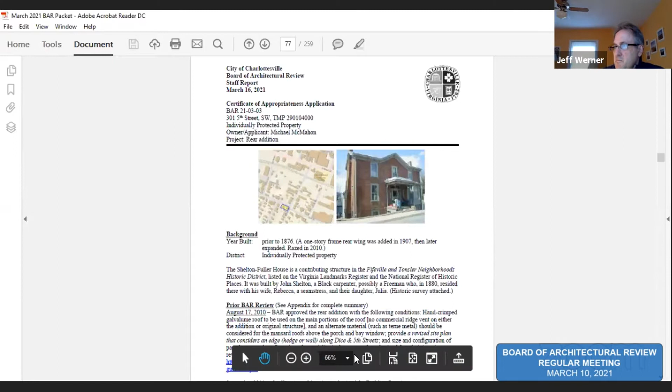Excellent, we probably need to stick to some sort of protocol. So Jeff, you want to introduce this briefly? All right, sorry. No, that's okay. I was trying to tell Michael there's gonna be limited pain tonight. So I've already been through this process, so it's okay. I know, I'm ready for it.

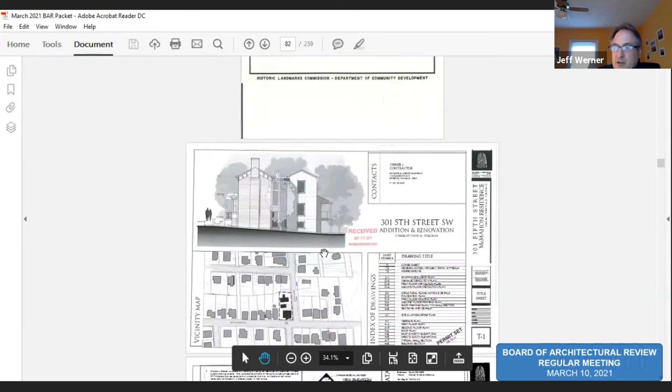All right, so quickly, this is a COA request for 301 Fifth Street Southwest. It's an individually protected property, the Shelton Fuller House. It is a contributing structure in the Fifeville and Tonsler Neighborhoods Historic District, which is listed on the National Register. It was built by John Shelton, a black carpenter, possibly a free man, who in 1880 resided there with his wife, Rebecca, a seamstress, and their daughter, Julia. So it's interesting—this is one of the older homes in the city.

The request is for a COA to construct a rear addition and related site work. This project had been reviewed by the BAR back in 2010, and the project was delayed and the COA expired. So that's why it's been brought back.

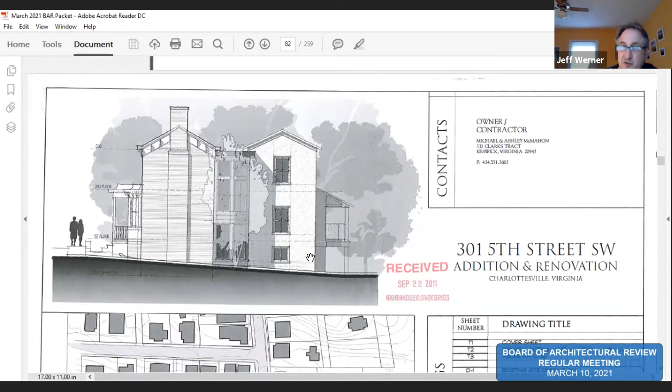The questions that were before the board were addressing the trees on the Dice Street side, so there was a recommendation from one of the BAR members to revisit those. So that's keeping it short and sweet. But staff recommended the approval with the conditions that were referenced by Mr. Schwartz, and whatever changes you all have.

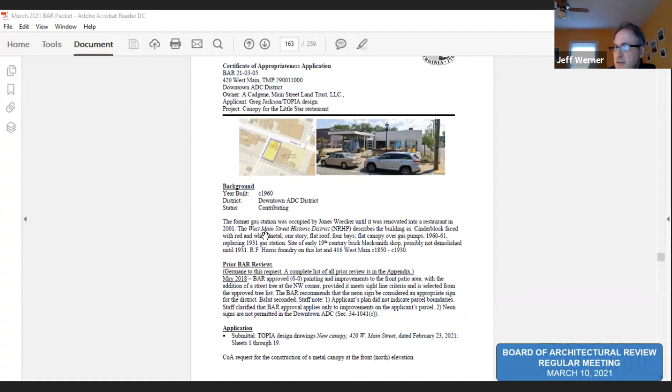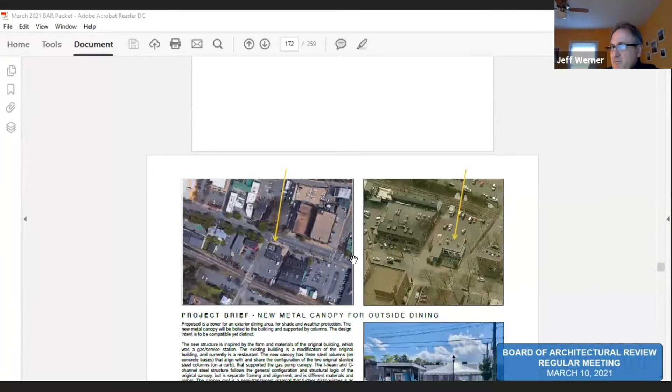I think the most recent time we saw it was in May of 2018. There were some improvements done in that patio area that you see on the front. Again, this is a CoA request for construction of a metal canopy at the front north elevation. Robert, I also have an interesting historic photo—well, not historic, but an old photo of it that's interesting.

As far as staff's recommendations, the building currently contributes, as said, to the West Main Street District, which has a history of automobile-related businesses. The BAR should discuss how the facade changes relate to the original historic building. The building has been modified over the years in adapting it from a service station to a restaurant. While the proposed canopy is aesthetically consistent with the current expression of the building's architecture, it is still an addition to the historic facade.

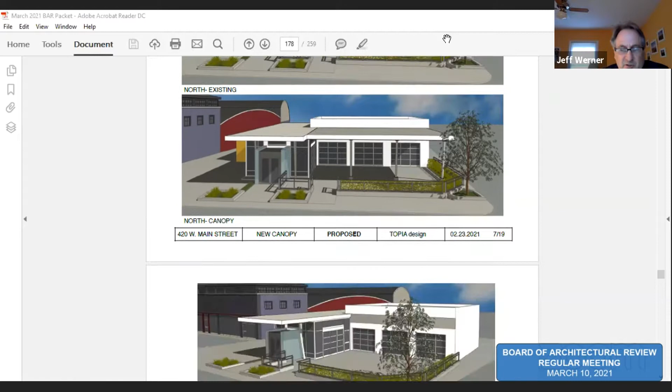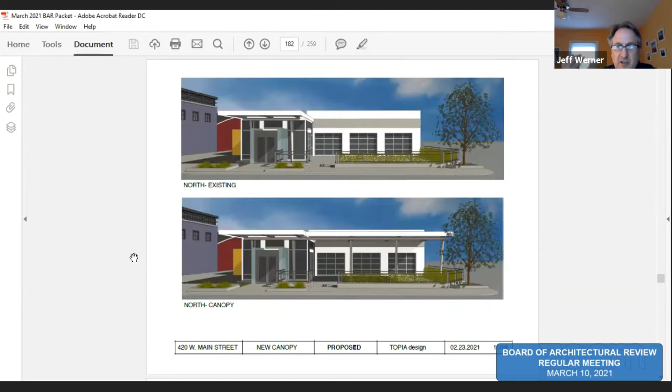Staff does support the design. In fact, we support this proposal and the intent of the design. Our recommendation to the applicant and to you all was that some way this could still remain physically separate, at least have a physical separation from the existing building—not to say that it's not anchored into it, but that it have possibly some connection points, while the surface does not appear to be a continuous part of the historic building.

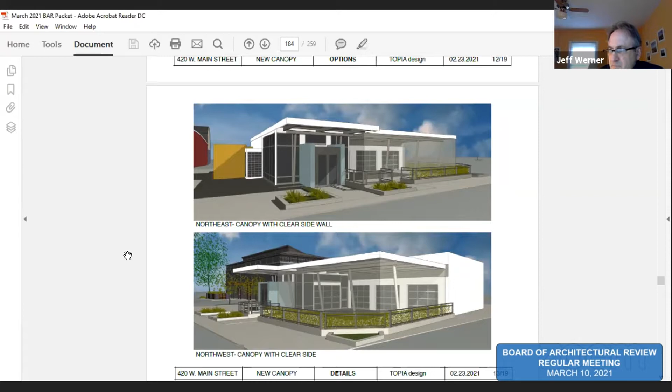There was a comment from the BAR about how the seasonal plastic walls will be anchored, and additionally the recommendation that the polycarbonate roof should have specification that there's a UV protective coating, due to yellowing that can occur on that type of material.

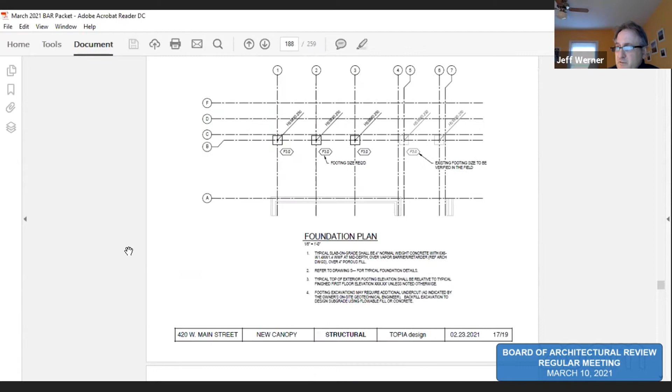There is no exterior lighting indicated. However, the BAR can also apply conditions we've used for lighting if it chooses. I'm sorry, it is the catenary lights, but not in terms of bright exterior lights. So again, our recommendation is approval, along with our comments about the design.

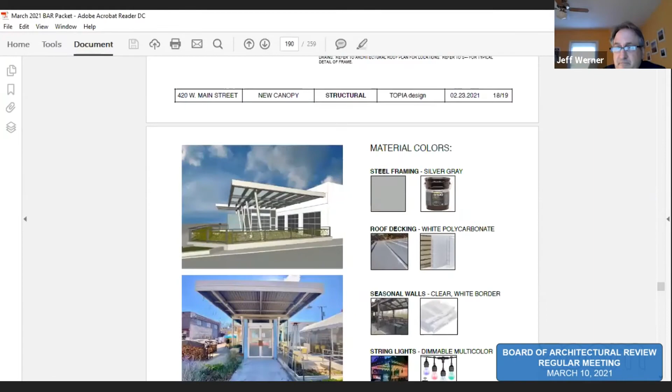Any questions for us? All right, Mr. Jackson, it's yours. Greg, I'm happy to go back into the application and share any page that you'd like.

Okay, hi everybody. I guess one thing I'll comment, there is a noting of lighting, although I know it's not attached in a permanent manner, but there is consideration for it — the owner wanted string lights that are dimmable, and will certainly adhere to the criteria suggested in 414.

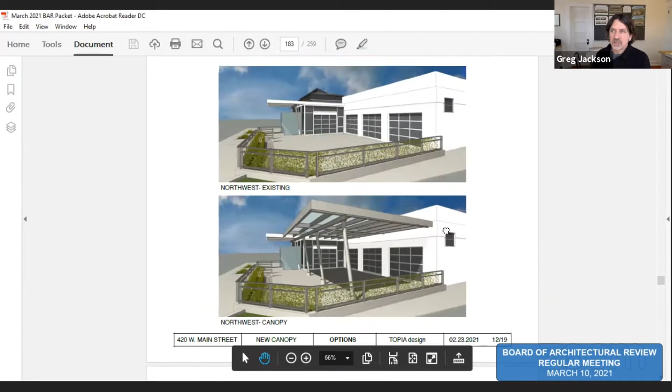And then I'm ready for any questions. One thing I am noting is that unfortunately my rendering is not perhaps as accurate as my color description. Probably page 12 gives a better indication of the difference in colors — painted silver gray against the white building, which was the change made since the last BAR meeting.

All right, well, thank you, Greg. Are there any questions from the public? Please use the raise your hand feature or press star 9. I'm looking at the attendee list, Carl, and I don't see any raised hands.

Okay, questions? I also have a sample of the poly roof if anybody's interested. So I like that. And I've held it up to the sun, and it does not allow the sun to come through as glare, which was one of my big concerns. Yet it does let light through.

The bronze and clear versions are different in their characteristics and what they do, because I was somewhat fighting the owner a little bit on this, but when I got the sample and was able to test it myself, I was turned around a little bit about it. And I did email the rep today to triple check that it is a UV coating on it to protect it from the elements. Thank you.

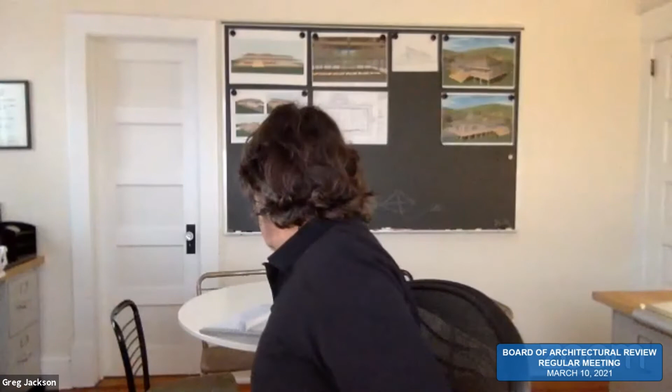Any questions from the board? I'm curious — so you're intending on supporting this off of the structure that's in the existing canopy, correct? So you would be kind of puncturing the metal skin on the side of that canopy? That's correct. Have you thought at all how that detail is going to work? Are you just going to cut a hole and sleeve it in cleanly, or are you taking off that metal?

No, I haven't considered that fully. I'm looking at the structural engineer's diagram, and that's basically what it is. So it doesn't address that completely. I think the intent is to go through and connect to that W10 that's in there, so we have to penetrate it.

So I can certainly get back to you, but I assume the look would be that we keep the flat appearance of the C channel, and the W8 just penetrates it. Now, how that's done, you're right, it could be tricky in being able to make that look clean. But the desire is that it'll just look like the beams are penetrating through the existing canopy, versus taking it off and putting something else in its place.

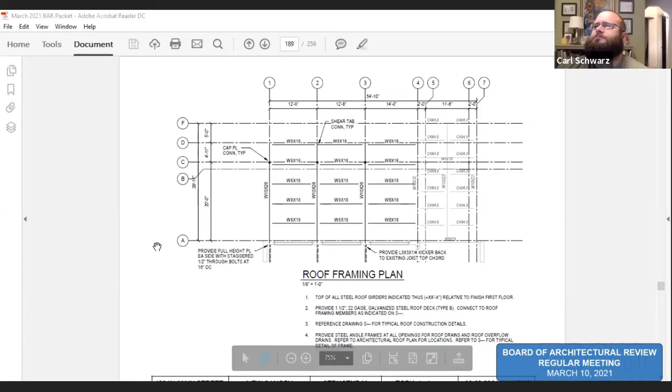And in fact, if you go to the architectural plan, page 15, that's more of the current alignment, we're spacing the W8s closer than they need to be so that they can be the structure for the roof without added purlins or anything like that. So it becomes a cleaner system, although there are more of the W8s in there. So it wouldn't necessarily align with it.

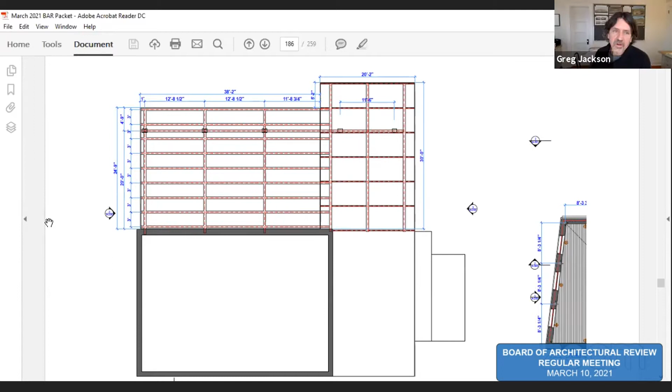In theory, with Carl's question, you would not see from outside to inside, but from inside you would see those members come into that space. Right, so there is definitely some detail work to be figured out about how those two overlap, as Carl pointed out. Okay, yeah, and one to make sure they don't conflict, but the other to make sure it's visually clean.

Yeah, working. Okay, and similarly, you'd need to develop a detail of how it intersects the main portion of the building, because there's a lot of metal panels that, excuse me, probably aren't super easy to just cut a hole in. I don't think - I mean, maybe it is, but you'd also have to flash into there, so I think we get the design intent, but I'm curious how that would end up being detailed.

As well as, where does the water drain off of this? Because it looks like - is it flat or is it sloping to one side? So it's a 1% slope, from the building out to the front. Let me see, I think there's an image somewhere that shows that a little bit better.

Is it page 16? I couldn't tell if that was sloped or not. Yeah, 16, you can kind of make it out.

So you're going to take the water off the front, is the idea? Yeah, so the slope off the front, and the intent is for it to also be sloped out to the west, to the street corner so to speak. At that point we would probably have to have some type of notch or tube to allow it to discharge up near the front corner at the top, or a hole.

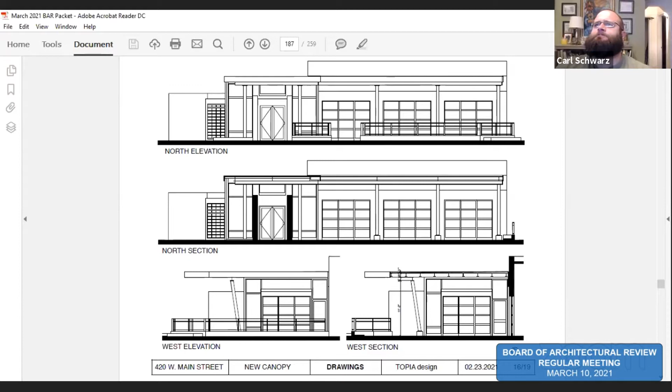Okay. I had one more question. Sorry. Sorry, Carl. No, go ahead. I have to find my question. It's just funny, the

The perspectival warp, or whatever you want to call it, implies that it's actually pitching back toward the building, opposite what Greg just talked about. The one advantage I see to that is you can bring your leaders down against the building and not float out at the outer corner, if your pitch was actually running the other way. Just curious. Yeah, that's a possibility, and that's basically a downspout.

I think at this point we're trying to not have anything else attached to the building and just have it shoot out in a sense. It's raining and it's just coming out from that point, further away from the building. But I see what you're saying.

I don't think - that's what it just sort of implies, the opposite direction, that's all. Yeah, I think it's maybe kind of an illusion in the way the perspective angle of view is when it's a snapshot. That combined with the raked back columns makes it appear like it's doing that. I mean, I see the elevations are flat, so I get it, but it was kind of interesting.

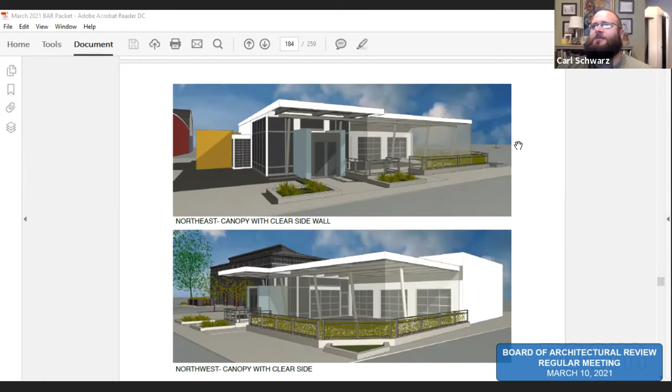I guess I just can't imagine they've got a lot of storage space, because I don't think you can fold this up pretty tightly. Yeah, so I can't see them taking it back inside. Maybe they would, but I guess that's a big question mark for me, is how these panels are going to work.

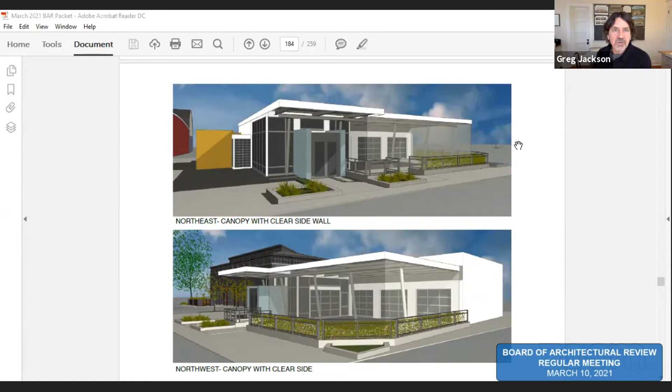Is the intention that they're seasonal, or more like shades? No, seasonal, just for that cold period. I'm hoping that these were put in place - actually, when I sent it as a review to some of you guys a while back, that was a question, and then we looked at it and I talked to the owner, and that's what we proposed. So it wasn't necessarily a part of the original intention to have those.

Had it been, I might have tried to look at some kind of sliding panel type of system or something, but even something like that begins to give it more of a presence that starts to take away from the building rather than just an open air canopy. With the clear plastic, it seems to allow it to still be an open air canopy, so you know it's just a temporary type of cover.

But it hasn't come from the client actually, so frankly I can follow up on that. I assume that they would want to use such, since I see them all over, but maybe by next winter it's not such a concern anymore - they have full indoor dining and it's not necessary. It's kind of a thing now. When we first started talking about this, it was to have it for all the outdoor dining, but I'm not sure if it will be that important, or even if they'll follow through with it.

It looks like you have space along the street elevation, inside the structure, to have a pretty significant roll. Judging by this, you've got about 9 or 10 inches clear under the roof there, behind the C channel, behind the outside channel. But we can adjust and make sure there is space there.

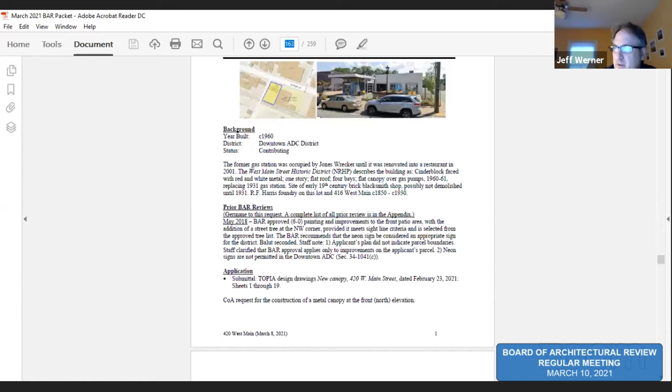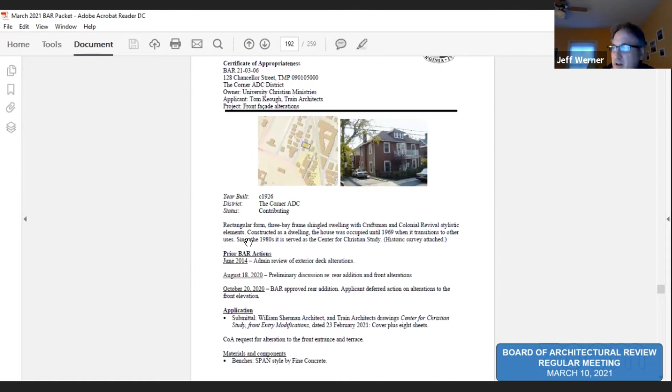Here it is. All right, so quickly I'll dive in. This is a COA request for 128 Chancellor Street. This is a structure within the corner ADC district that is contributing. It was constructed in 1926. It's a rectangular form, 3-bay framed shingle dwelling, with craftsman and colonial revival stylistic elements. It was constructed as a dwelling. The house was occupied until 1969 when it transitioned to other uses, and since the 1980s it has served as the Center for Christian Study at the University of Virginia.

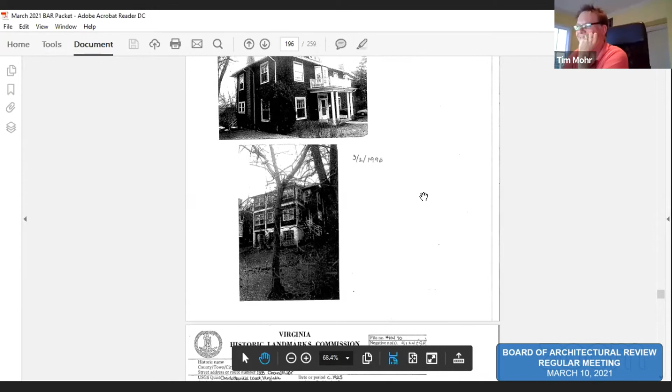This is somewhat of a continuation of a project you all reviewed last year for the rear addition. There were some alterations to the front elevations, and those were pulled out with the decision to treat those separately, and that's what's here before you now. So this is a request for alteration to the front entrance and to the terrace - I guess you could characterize it as a hardscaping project on that entrance terrace. We were kind of wondering why I didn't recommend this as a consent agenda item, but staff does recommend approval.

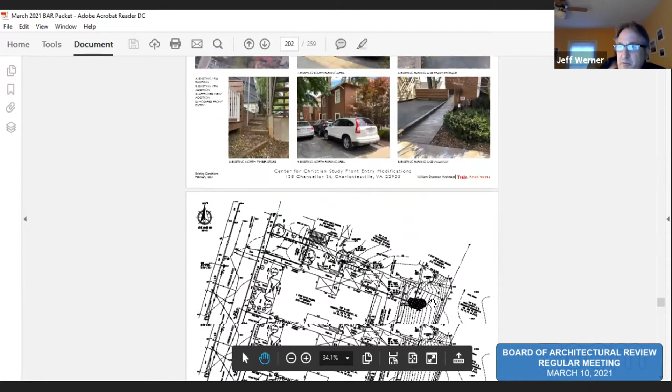Any questions for Robert or I? Bill or Tom, do you guys have anything to add? Sure, this is Tom, and just thank you for seeing us tonight. Bill and I have chatted a little bit before the meeting, and I think Bill's going to just give a little bit of explanation and background to it, and then we'll let you guys have it.

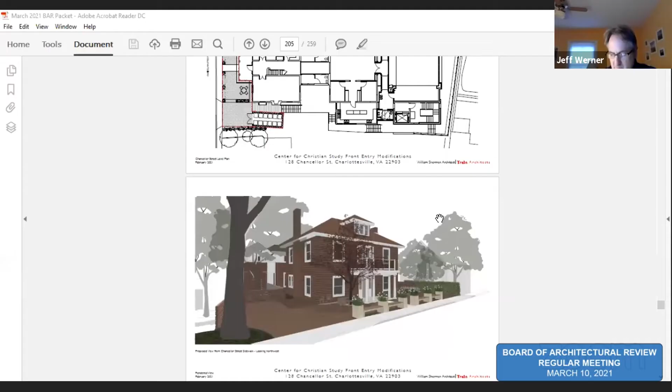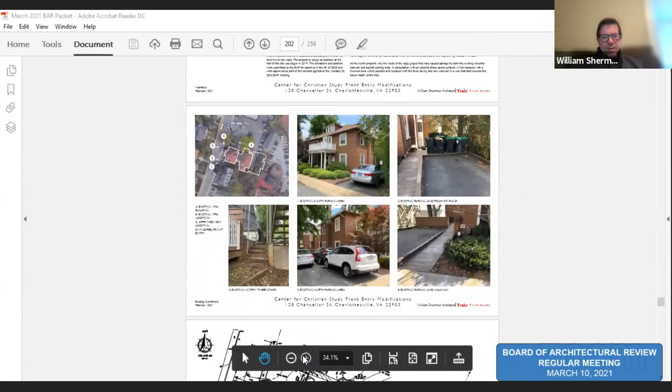Okay, then Robert, if you could pull up first the page with the existing conditions. I'm getting an echo here, which makes it a little tough. There, that's what I wanted to take a look at. This project, as Jeff mentioned, is a hardscape project looking at the front entry, which currently has an asphalt parking area across the portion of the front, and some plantings, a couple of bushes, and some ground cover in front of the house. The desire of the Center for Christian Study is to make this usable in a way that would be more amenable to a range of uses.

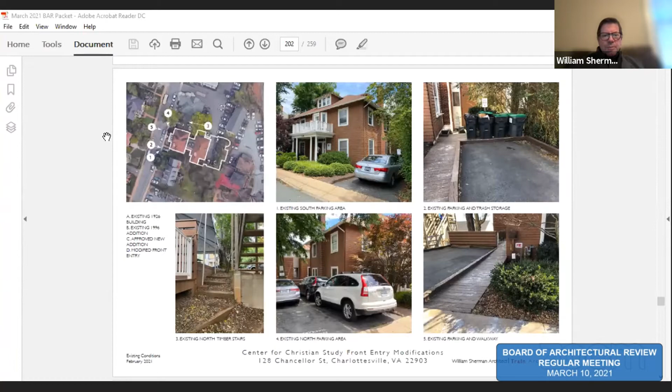Robert, if you could go forward to the last page, the smaller plan. Actually, let's back up to the renderings for a moment, and then I'll walk you through. This is a view from the south corner, looking at the removal of the asphalt, replacing it with brick on sand in a herringbone pattern. There is a series of benches along the edge of the sidewalk, intended as both a kind of gift and an invitation to the city, creating an edge that demarcates the boundary between the center and the sidewalk, but they are open to seating on both sides. There's also a small planter bed visible there.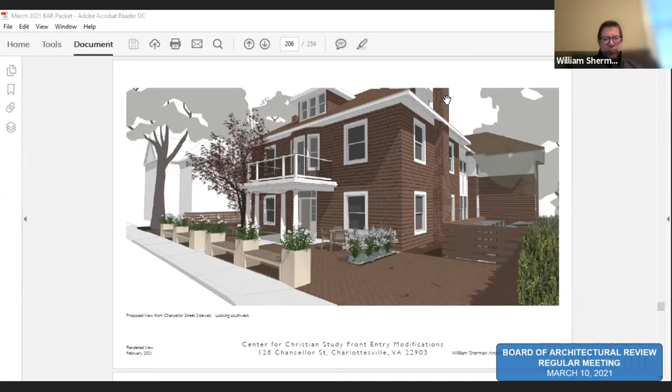Let's jump to the plan, and I'll walk us quickly from right to left, from south to north as we move up Chancellor Street. There is currently on the property something of an enclosure for garbage and trash cans, and a parking space on that south end. The parking space would now be bricked, but that means it could also serve at times as not a parking space. The garbage can area would be enclosed in fencing that matches existing fencing on the property, and painted to match the paint color of the house. There's a kind of boardwalk that runs back along the edge of the house - that's actually the fire egress from the fire stair of the new addition behind. In front of the existing house, there are no changes to the building structure itself, just the landscape in front.

There'd be an area for a terrace where they may have some wooden furniture and some seating around an existing Japanese maple. The benches that you saw create an edge to the street, maintaining the current entrance to the front porch and front door.

To the left, we've shown this with the parking that is possible here, but the goal and intention is that it would not be used as parking all the time. It would be possible for them to put up a tent in conformance with all the tent regulations in that space.

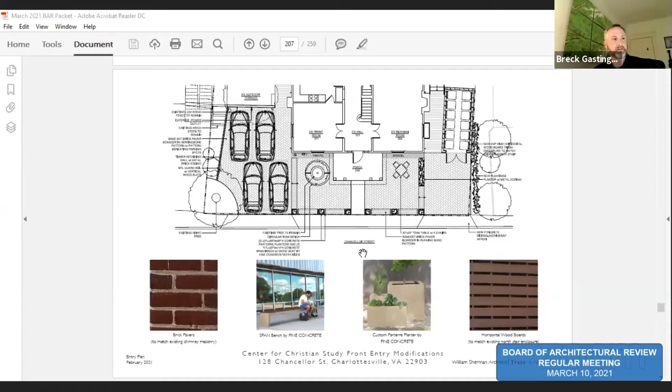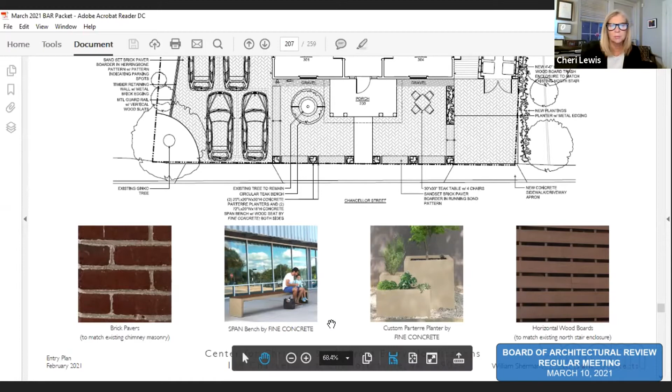Yeah, I think that's their current intention, is to match that chimney. I don't know how monochrome the chimney itself is, but it looks like it's a little bit varied. Anyway, I withdraw my own amendment to my motion and let others entertain others.

Thank you. I could see an amendment being a recommendation, not a requirement, to look at the brick color for more contrast. Do you accept that, Cheri? Yes. Okay, I'll second your motion.

Thank you, Carl. I'll go ahead and call a vote. Mr. Bailey, Yes. Mr. Mohr, Aye. Mr. Schwarz, Yes. Mr. Lahendro, Aye. Mr. McClure. Thank you. Miss Lewis, Aye. Mr. Edwards, Yes. Mr. Gastinger, No. and Mr. Zehmer, Aye.

Thank you. The vote is 8-1 with Mr. Gastinger opposed. Oh, Andy is saying 2? Oh, I'm sorry, Andy. Okay, the vote is 7-2 with Mr. McClure and Mr. Gastinger opposed.

All right, thank you, guys. I do have one question. So are we going to ask Bill and Tom just to circulate, or give to Jeff the changes, just to circulate them through the board, just for us to confirm that it's not significant from our point of view? I guess we should let Jeff look at the permit drawings, and he always... I don't want to speak for Jeff. Jeff, you speak. Sorry.

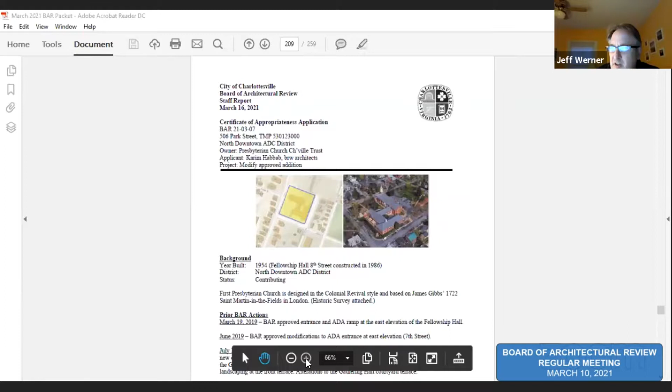Jeff, could you introduce 506 Park Street, please? I shall, thank you. So just so you know, we're joined by Karim and Bruce Wardell, who represent this project. This is a COA request for 506 Park Street, within the North Downtown ADC district.

The First Presbyterian Church is designed in a colonial revival style, based on James Gibbs's 1722 St. Martin in the Fields in London. It was constructed in 1954. The Fellowship Hall on 8th Street was constructed in 1986.

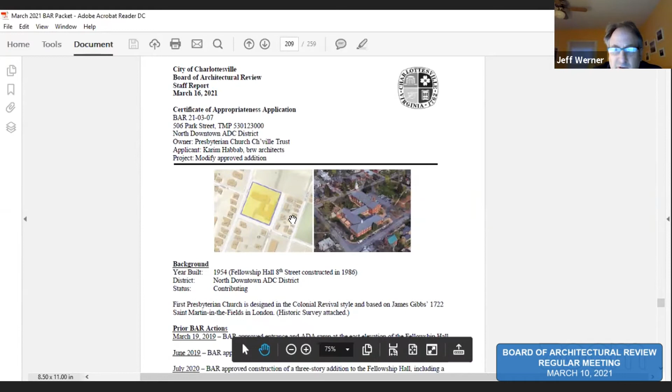Last summer you all reviewed a somewhat extensive set of changes going on, primarily on the east side, with the addition of a new gathering hall and exterior terrace. There were some other changes going on towards the front of the church, to the south of the sanctuary.

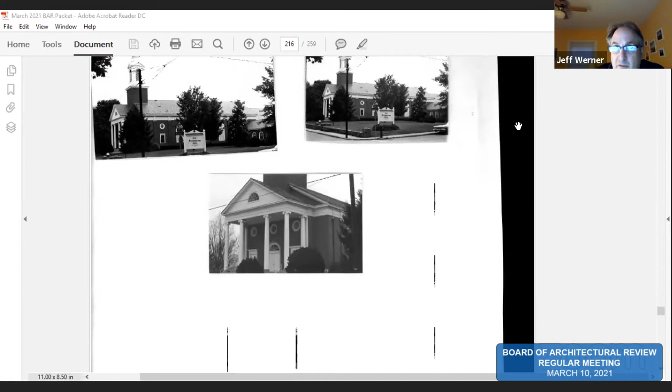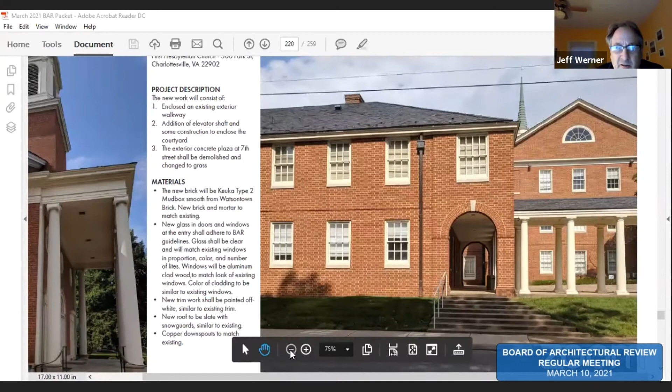Where we used to have a revision to a COA, this is a new request, and it's to, I'll use the word modify, what was approved last summer. This is in that northeast corner where that addition was planned - that's being eliminated. In fact, you can see in this drawing, the arcade will be enclosed instead. A handicap access ramp will be built, and an elevator tower constructed at the rear of the sanctuary.

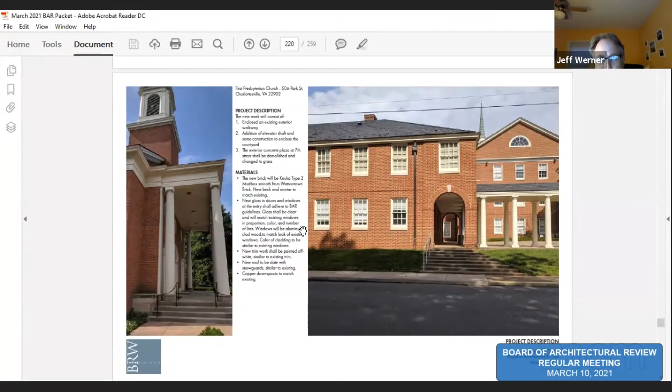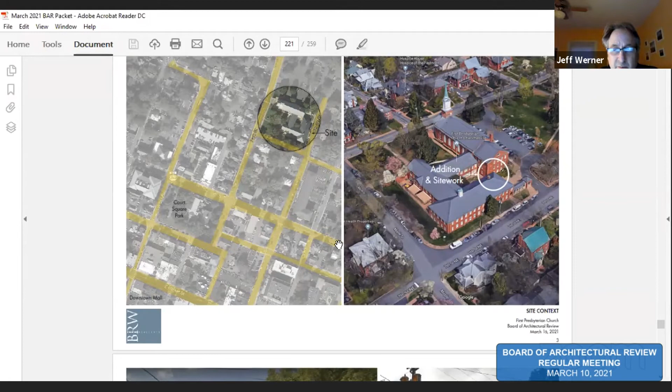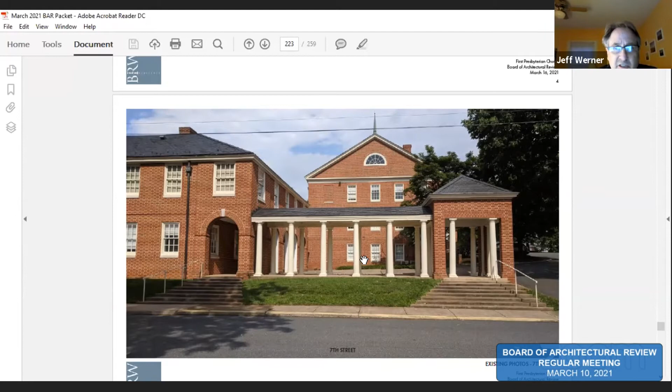So it's a relatively simple project - it's just making sure everyone understands what's still in and what's not, relative to the prior work. There's some questions about trees we're going to have to get into, but as far as what's been proposed, staff didn't feel anything was problematic. There's some clarifications we've received from the applicant that I think you all should discuss.

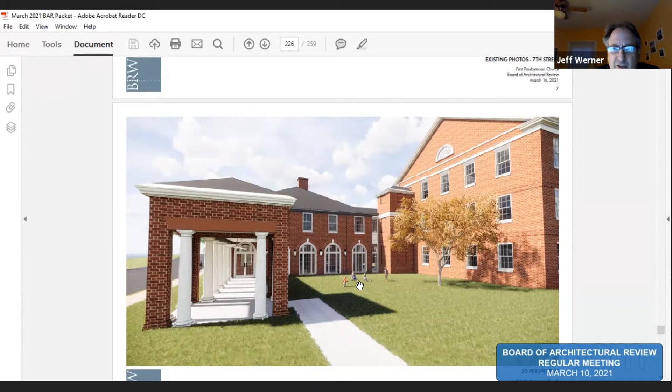For example, in the elevator tower we had at the back of the sanctuary, you can see there's a stone or painted sill - that image there adds sills to those insets. What's the proper architectural term for those insets, those recessed panels? Blind windows. Okay, thank you.

So there's that situation, and then the lighting and the clarification on the sills, and the clarification on the landscaping were the two things that staff wanted you all to make sure we're clear on. We have no problem with this one and recommend approval otherwise. So any questions for me? Okay.

Bruce or Kareem, do you have anything to add? I'm happy to go to any page as necessary. Okay, thank you.

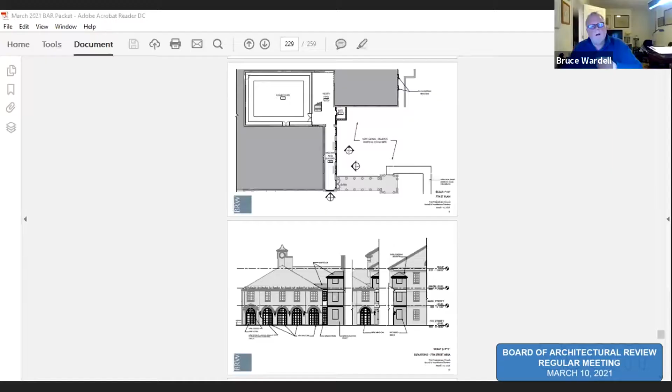I'll give you a little bit of background on this just to set the stage. This is certainly a function of the sequence these things happen in, where early in the project we bring something that we need approval for to get other things going, and it's a combination of understanding the ultimate costs of that addition, combined with what is a unique opportunity for the church.

The addition was actually phase 2 and 3 of a 4 and 5 phase plan. The later phases were renovation of the interior of the building. We found that the costs of the addition were higher than expected, along with a relatively unique opportunity to renovate a building when it's not being used, particularly for a church. That's always an issue you have to wrestle with, how do you keep things going while you're doing major work inside.

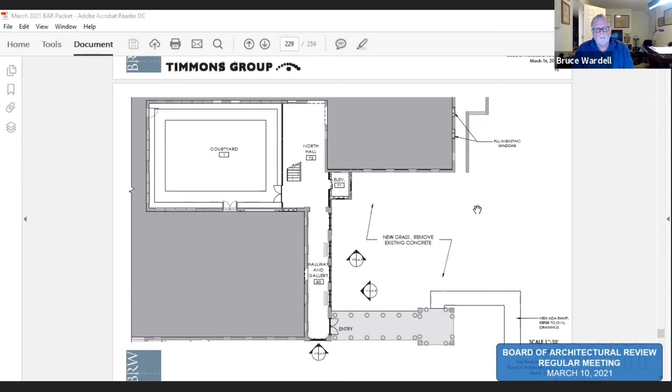Within the last 2 or 3 months, the church decided to take the opportunity to do a comprehensive interior renovation, and then make this addition actually phase 5. So this is an effort to put in place the interior renovation, but also allow for the future construction of the addition as we had envisioned it initially.

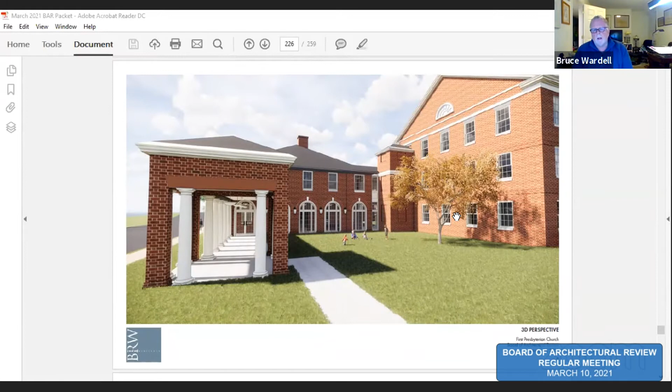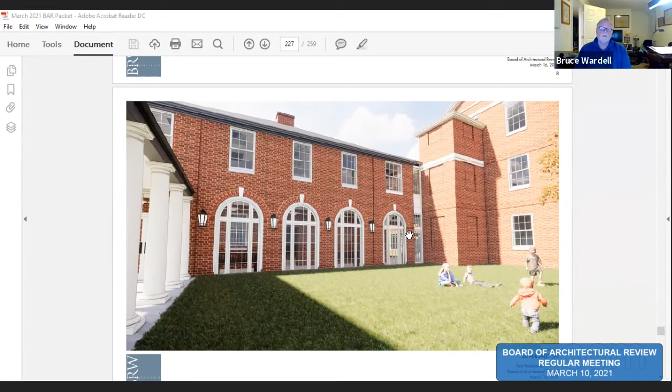The one major thing this means architecturally is that the arcade that is currently open gets enclosed as a sort of entry from the parking lot. They also did not want to put off the accessibility of the entire building, so it's one of these odd situations where we have to place an elevator that is waiting for the building to surround it. There isn't really a gracious way to do that. So the way we've done it is we've taken up the language that already existed on the building.

These blind windows existed right in the place where the elevator is, and then we enclosed the arcade, leaving the existing colonnade. Leaving the existing colonnade does a number of things.

It certainly preserves access to the building there. It creates a very logical and identifiable entry. We will add accessibility to that colonnade, and it also separates from the street what will ultimately become an area that children will inevitably be playing in. So there's a kind of architectural barrier between what will be a play yard and the street itself.

The landscaping in that area is relatively minimal, simply because it's a placeholder for a future addition. One of the things we discussed recently was the removal of a number of trees and the identification of trees along the roadway, the driveway that goes from the upper parking lot to the lower parking lot.

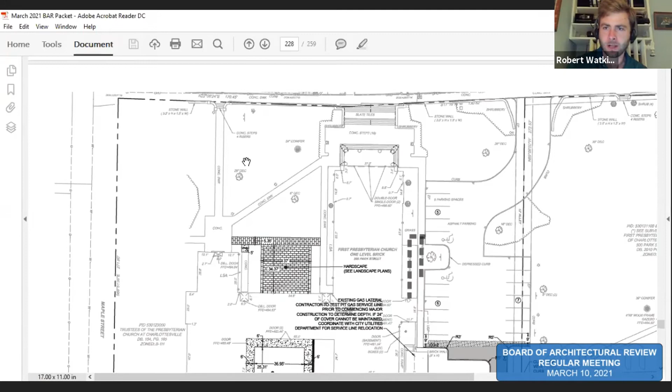Okay, if you will touch that drive that goes from the upper parking lot, you've got your place right there. The trees from the original site plan—Jeff may have the diagram of where those trees are in the original site plan. They will be planted during this phase of the work.

There are no changes to the interior courtyard, and none that we will continue otherwise. We will build the front terrace that is on Park Street, and there are no changes to that. I'm trying to think what else we ought to clue you into. I think that's about it. What have I missed, Karim? I think that is all.

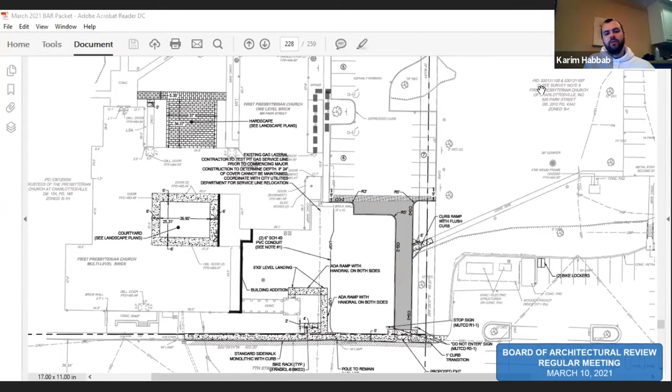We had some questions on the handrails earlier from staff, and I think they'll just be painted the same as approved in the initial phase 2, painted black. On the handrails, my sense was it was going to match the ADA entrance that was added about 2 years ago, which had a metal railing associated with it—this would be similar, matching the conditions around the building.

I assume everybody received the email from Jeff that Karim responded to with a series of questions. I included that in an updated version of the packet, it should be the last few pages of the application. If you have the packet online instead of downloaded, it should be there too.

So the public has it. Yeah, I think we answered another last minute question about the maple tree that you guys had, and that is staying. That is not being removed.

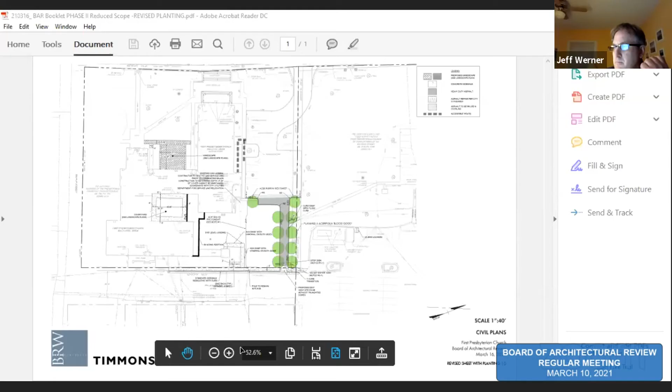Could we confirm which one that is, just so we're clear? If you look on the right hand side, the 4 London plane trees, above the second one you can see a tree. Now the London plane tree is essentially a sycamore. There's probably, I don't know, a 30-something inch maple. I don't know how the London plane tree manages with an understory tree, but that was all I asked. Is that staying or going, or was it something we reviewed last summer? I couldn't recall, but I just wanted to make sure that didn't slip by and everybody wondered what happened.

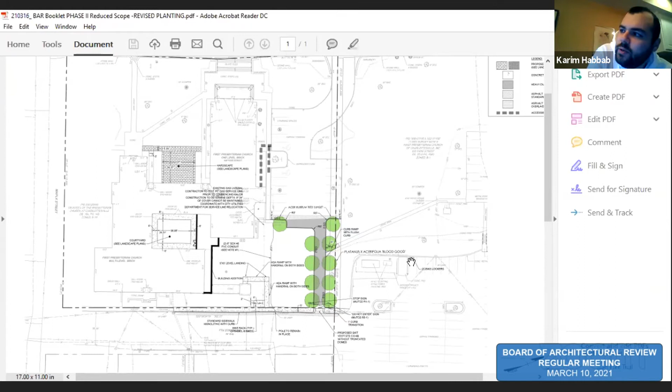Yes, Bruce, I don't know if you want to talk to that. I have some information from our civil engineer. I think that tree was mislabeled on the drawing. We have an image of it, and it looks closer to 12 inches, not 30. I think it was labeled as 24 inches. It's a lot smaller than it looks.

And any tree that we do preserve is going to be preserved temporarily because it would be within the work of the addition. Also for clarification, I keep saying 8th Street, but this is actually 7th Street on that side. So I'm going to drive the little Google man down there now, if you all want to take a look at that. There it is.

It's the one back by the building, right? I think if you look to the right some more, it's not this big tree, it's that one you see behind it, by that white fence thing. I think you're right. I've got so many things open, I can't figure out which one it is. It's that one, green, yeah, I believe so.

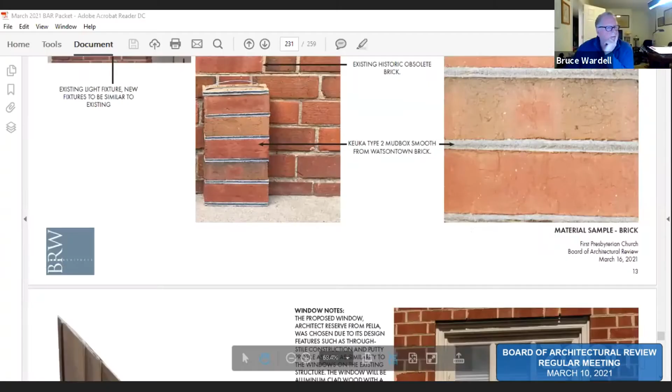Oh, there we go. Okay, it looks like there is a trim board up there, a fairly large wide trim board right above the window heads. Let me pull up the photo of the actual thing. It looks like it might be a pent eave even, is it? There is the trim at the rake for the gable that goes all the way across, and then there's simply a sort of half round window in the gable.

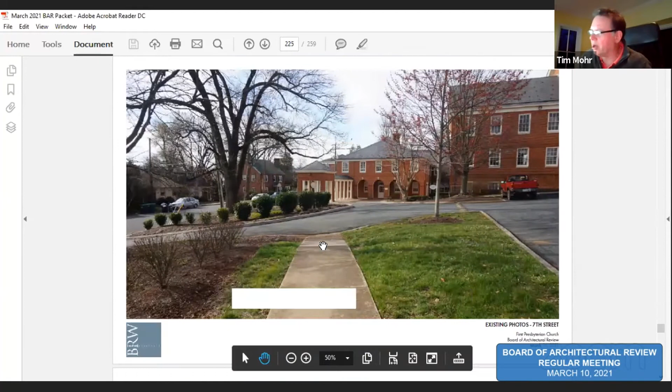Right. The model's a little funky in that regard, but I don't know. I just wondered if there was some way to minimize it even more. I think you could make a strong argument for bringing it up to the trim that's just above the third story windows.

Yeah, and I don't even know if I'd bother putting anything much more exotic than what you already have down in that middle band — move that middle band up and call it a day. I agree, yeah, I think that makes a lot of sense. It would be cheaper too.

And I do think it makes sense to put the little cast stone sill in, you know. When the addition is done, the east side of this wall will still be exposed inside, and the north side may be exposed too, so that sill would be part of the addition when that's done.

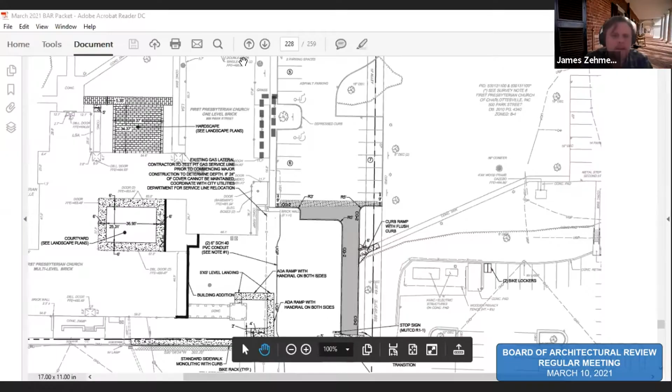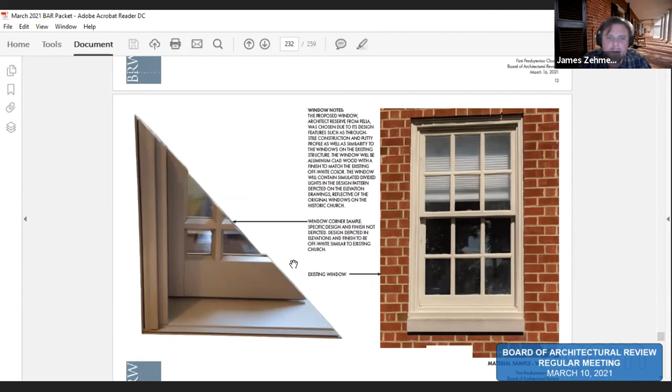Just one last quick thing, it's the last page of the packet. There's a window sample, and the note does say it's not the final sample or anything like that, but it doesn't match the Muntin profile. I'm just wondering if once they find a window that does match the historic Muntin profile, if that could be submitted to staff for verification. That's certainly agreeable to us.

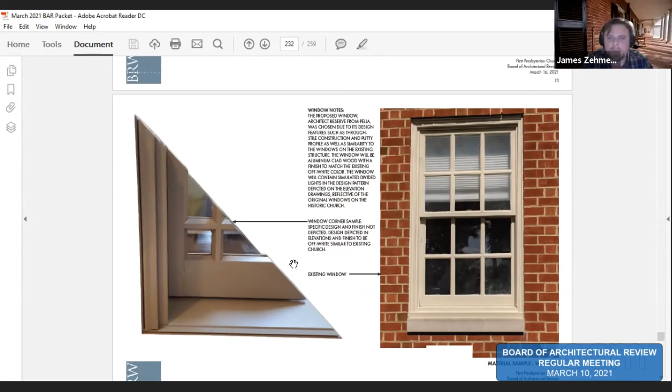If you zoom in on it, the historic window has sort of a 3-step Muntin profile, kind of colonial revival. Well, to confirm, it looks like the window notes say that you're going to use a putty style Muntin. Is that the intention?

You're catching me a little off guard here in that I'm not sure where we are with Pella right now. Kareem, do you know where we are with Pella and the profile of the Muntins? Not really, no, we have to work out the new. Yeah, it's been a while that we were working with Pella Windows to get a profile that more closely matched the existing profile on the building. And I'll have to admit, I don't know what their current response is.

So I think we approved this before. I believe this page was in the last submittal, am I correct on that? This is not new information. I should know, does this relate to infilling the arcade? Yeah, I think it has to do with the windows now, and infilling the arcade is what we're looking at, right?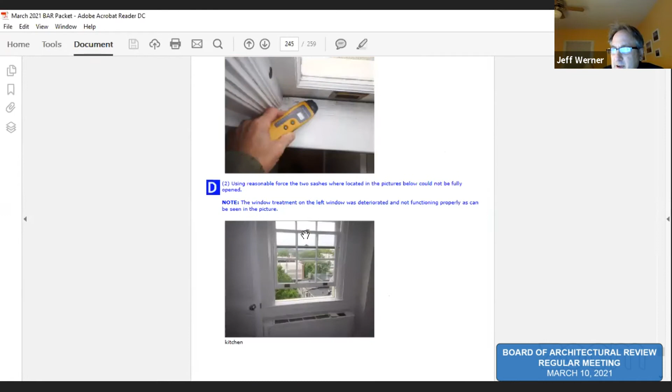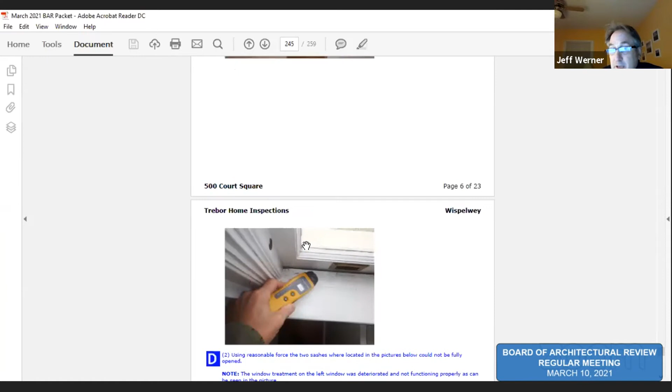From reading Mary Joy's staff report, it was clear that there have been replacements over the years that have not gone to the BAR. The comment at that time was that when this was approved, the city recommended to the homeowners group—I'm not sure how the ownership works over there—to come up with a plan for when windows are replaced: what is it that we want? Possibly, July 2011 is an example of that, that's one side of it.

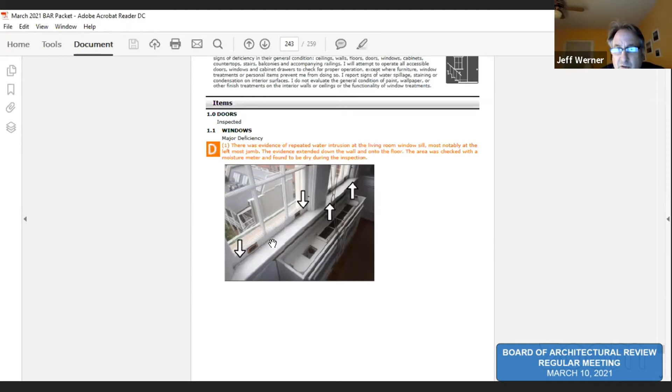But the other side, of course, is with the replacement of windows. I will say I'm getting a lot of questions in the last couple of months about window replacements, and I've been repeatedly pushing the point to people that repairing windows is a lot less expensive than replacing them, and that kind of fits the bill here. What I am looking at is some water infiltration, that probably has more to do with issues with the sill and the window frame than with the sash, and possibly something could be fixed with repairs to the sill and better caulking and maybe storm windows on the exterior. This is the south side, and we all know that's the heavy weather side of any building in Charlottesville, particularly if it's up in the air like this one is.

So that was all—my recommendation wasn't necessarily yes or no to replacements, but that from a cost standpoint I don't know if it's necessarily the right solution, and simply replacing the windows may not fix the problem they're having with water infiltration.

That said, if the BAR does approve this, I think it's an opportunity to express a standard—not approving requests that come in for 500 Court Square, but certainly expressing what would be expected in an application, and what is acceptable as a replacement, at least the criteria for that. Among that, certainly we have conditions reviews where with insulated glass and applied grills, that the grills are the same dimensions, the same light configurations, the same alignments with the spacer bar within the insulated glass.

And with that, that covers everything I said. I'll hand it off to... Jeff, I'm sorry I didn't bring this to your attention earlier, but we've been in contact with Doug Brooks, who represents the Condo Owners Association. I hadn't heard from him, and he hasn't joined the call, so it doesn't look like there's an applicant ready to represent this project.

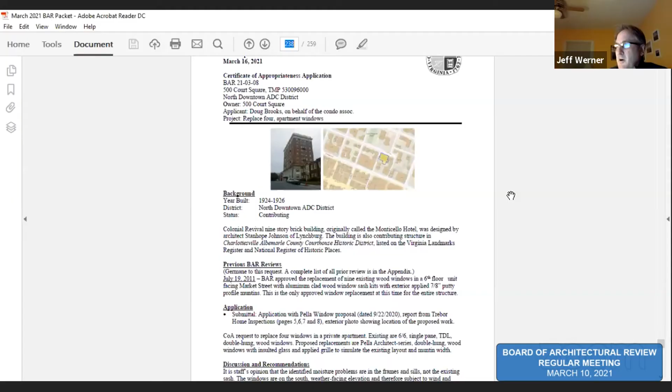Sorry Jeff, you're on again. Not sorry, I'm trying to... you finding it? Yeah, now my computer's yelling back at me things. No, it's not a problem. And the applicant, just to let you know, the apartment owner and the property manager both signed the application, so it came in, the building owner is aware of this, but it would help to know who's who.

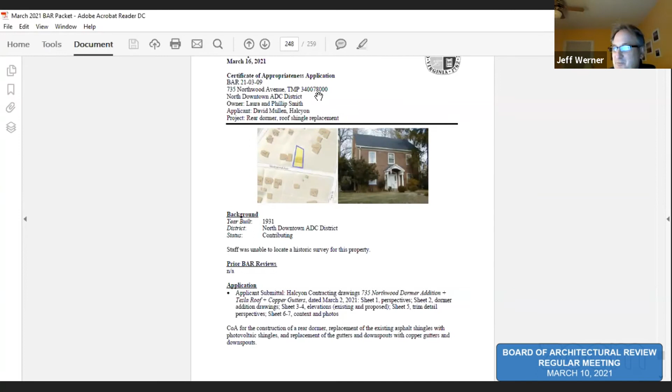All right, we're now jumping ahead to 735 Northwood Avenue. This is a COA request for the addition of a rear dormer, and probably more critically, a request to install photovoltaic shingles replacing the existing asphalt shingles. This house was built in 1931. It is in the North Downtown ADC district and is considered contributing. Sorry, I'm reading my version of this — thank you Robert for cleaning some gibberish up. This is a COA request for construction of a rear dormer, replacement of the existing asphalt shingles with photovoltaic shingles, and replacement of the gutters and downspouts. They want to go with copper gutters and downspouts instead of standard seamless gutters. I think everything's fine with the rear addition, and certainly with the copper.

I put this on the regular agenda. I'm so intrigued by the roof shingles, and felt it probably deserved the discussion we're going to have about it. As I mentioned before we started, we don't have a sample. I know the applicant's trying to get hold of one, and we'll figure out how to take a look at it. I guess they can also address what their schedule is as far as moving forward. Is it more important to get the okay and move forward the dormer, maybe separate out the shingles? I don't know, but I put that on the table.

So again, not really any issues with this one. More curious than anything, and I hand it back to you — I think the applicant's ready to speak.

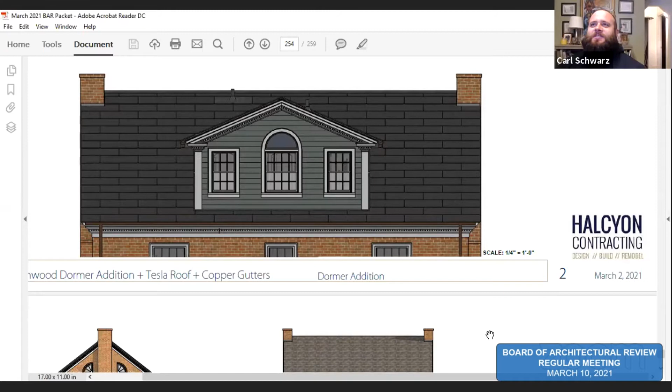I think it's the design work that they'd have to put in engineering the circuitry. Probably they want to make sure they have a project in hand before they — David, is that... I don't mean to speak for you, but I don't really know that I can speak for Tesla. The way I interpret it is that what they're trying to do is get a fixed plan from us that they can then give us a design for.

I agree with Breck. I think this will be a fantastic test case, and a good example we could then use if other people wanted to do this. Personally, assuming the imagery on Tesla's website is pretty close to what you get, the design work is more of just — I don't know, I'm not really sure what the design work would be. I guess the electronic portion of it.

I probably could approve the shingles tonight, and just that you'd submit the final shingle design to Jeff to make sure there's no surprises in there. I don't know if anyone else feels... I agree with you.

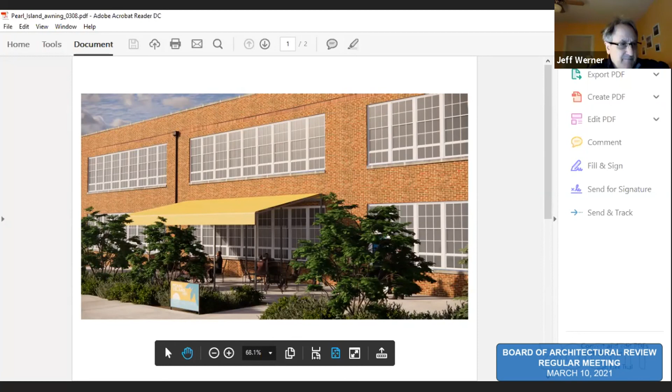I'm allowed administrative review of the addition or deletion of awnings, canopies, storm windows, storm doors, gutters, and similar appurtenances. I think the intent there was the idea being like little canopies over an ATM or something like that. I wouldn't be uncomfortable at all approving something like this. What I tend to look for when someone asks me if I can okay it is, are you making a hole in the wall? Are you plugging up? Are you changing that building? And in this case, I would say they're not. So I would be comfortable.

But I guess asking you all, do you interpret this as an awning or a canopy? Is this going to be associated with Pearl Island? Yes, okay. So this just came in this evening, but this is a good example of why we have to have some good conversations, and when we have time, maybe we just have to wait until we're all back in one room, but kind of go over the things that I am okay saying move forward on, and then where we're getting kind of these gray areas.

And while this one came in this evening, I figure I would ask you all what you think. Not saying I can approve it or you approve it. Just, it looks simple and elegant to me. Yeah, I also think it seems rather reversible, and that should also be something you can kind of use your judgment on. If it's very reversible, then it doesn't do a long-term detrimental effect to the historic resource.

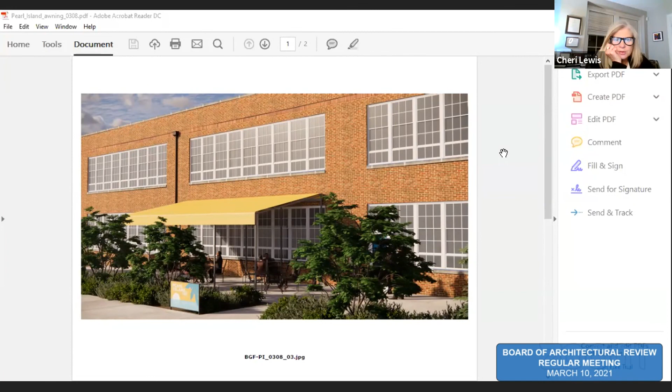It looks like there are poles that are along the wall surface, right? That would be, yeah. Now, if it were a fabric awning, it would be attached to the wall, but I tend to, when I see things near bricks, I ask questions, and the thing would be, is this independent and floating? And James, thank you, yeah, reversible, that's the first thing.

All right, I would be very comfortable approving this as an awning or a canopy, and saying no plastic, no vinyl wrapping, no vinyl shower curtain going around it.

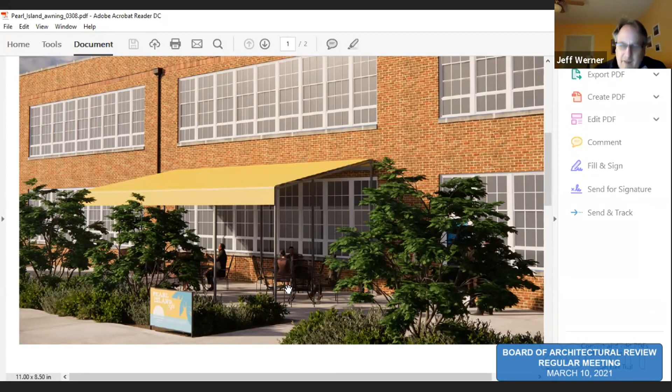All right, I won't belabor the question. Can I say, from my perspective, given the clarity of this building, that this is a case where it'd be more appropriate to have umbrellas or something like that?

I think so. I agree that this is a freestanding structure, so that certainly means it's less damaging, shall we say. Ideally, the trees one day will be big enough that it would work fine, but it just doesn't seem 100% right to my mind in terms of the building type and all that kind of stuff. If all of a sudden there's another one next to it, another one next to it, you have to call for it to stop at some point.

I guess that's where you all count on my judgment. Do you approve tents, or do we have to see them? Yes and no. When it's in the backyard and someone calls me and says my piece of fence fell down, I say, well, what's the rest look like? And they'll say, well, it's going to look like this. Fine. But not fence, tents.

There is a provision that allows seasonal approval, sort of like cafe furniture. As long as you follow the rules, you're good to go. It's when they become permanent or on the mall that you all do have purview to review it. I mean, this is kind of a tent, and it's kind of going to be there, but I'm fine with letting you have administrative approval for that.